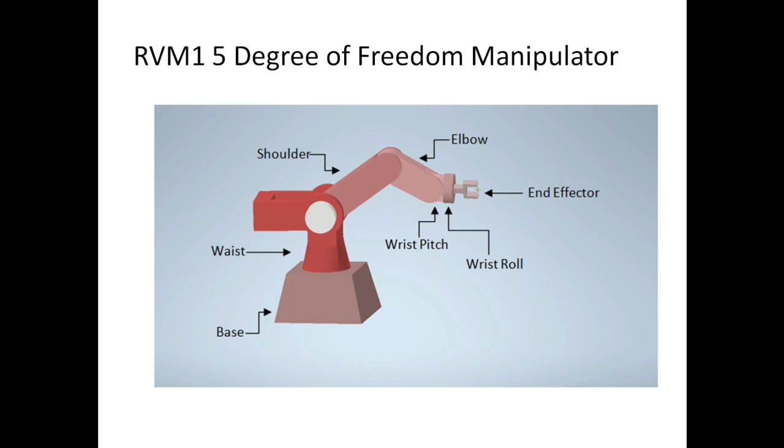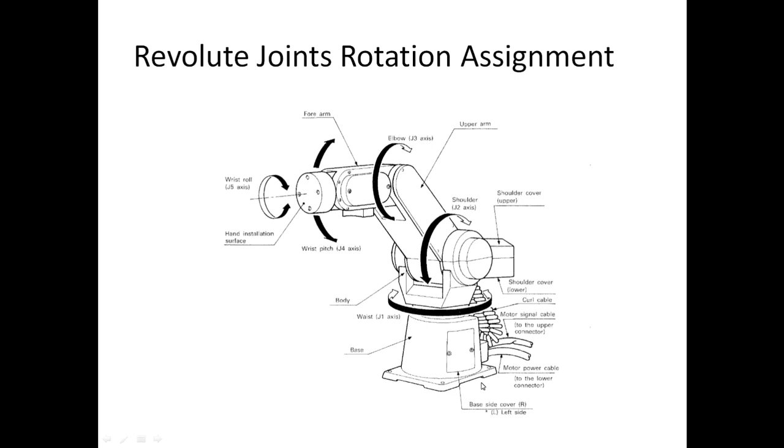So you can see here, this is a 3D model that I created using Autodesk Inventor. The joints are actually all different revolute joints. These are the different rotation assignments. Let me show you the 3D model that I have created.

Okay, so let's open Inventor. So this is now the 3D model that I have created. All right, so let's just adjust the view.

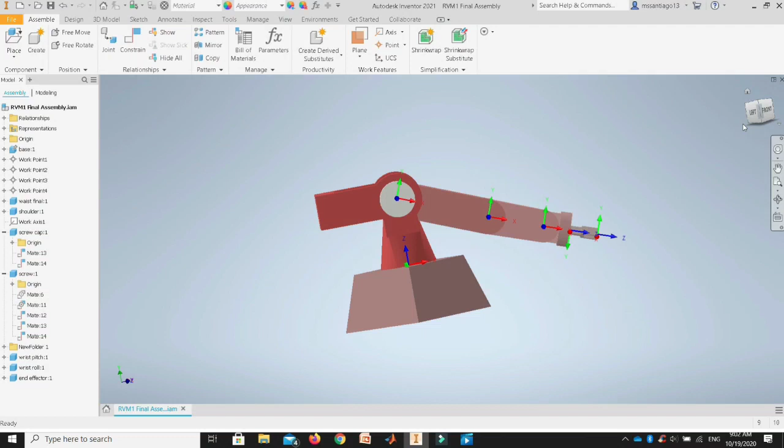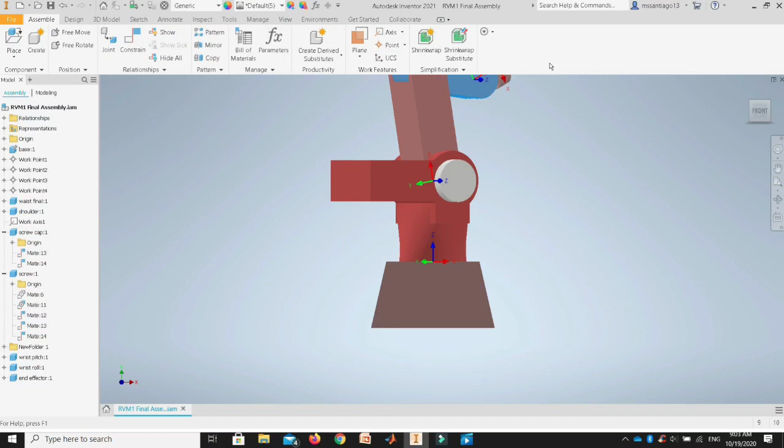Alright, so this is the base, then you have the waist here. The way the waist moves is that it is actually just doing this rotation. Now for the upper arm, that's the shoulder. For the elbow, and then your wrist pitch,

and then your wrist roll. So the end effector will be moving together with the wrist roll.

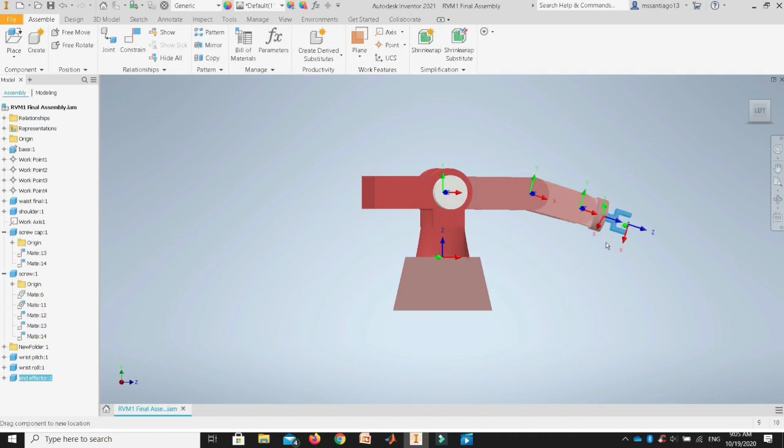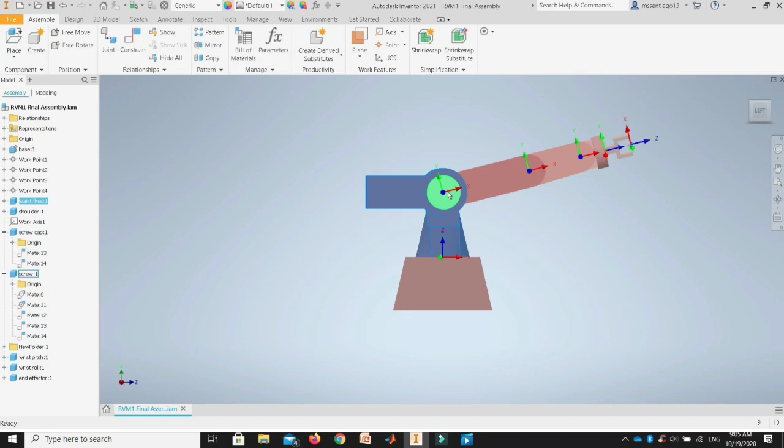Assuming that this is the view of my end effector, if you noticed, you will be only able to see two axes. The third axis, which is represented here as a dot, means that axis is going out of the page, either going out of the page or going into the page. So let's assume that this is the position, or the view, of my manipulator.

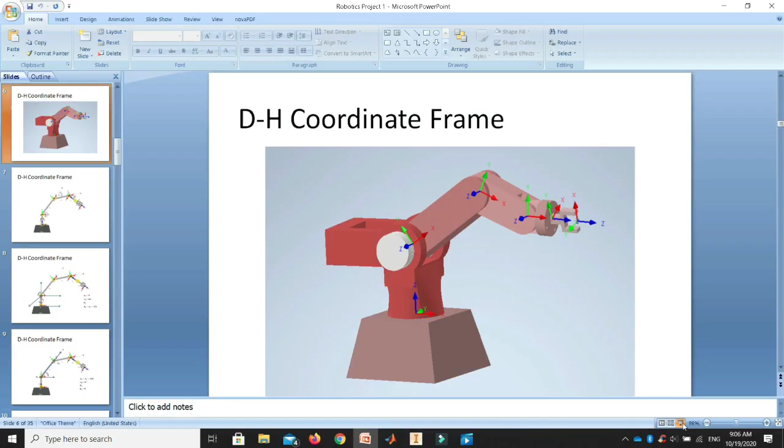Alright, so with that view, I'll be able to create now my coordinate frame. We will be following the DH coordinate frame guideline. First, the Z0 axis. For the coordinate frame guideline, it says that the Z-axis, or the Zi axis, is assigned along the axis of motion.

So we saw earlier that the axis of motion is actually going this way for the waist, which means that the Z-axis, or the Z0 axis, will be going on that motion. So that is why we have the Z0 axis going up here.

Since this is the first coordinate frame that I'm going to create, the zero coordinate frame, there is no Z-1 or i-1 direction or coordinate frame. So I'll just assume my X sub 0 to be going here, and then following the right hand rule, that means my Y sub 0 is actually going out of the page or into the page.

So with that, I also assigned my origin 0 here. So this is now my zero coordinate frame. Now moving forward to the next joint.

So again, the Zi axis, this time the Z1 axis, is assigned along the axis of motion of joint i+1. So this is the link. This is now my joint.

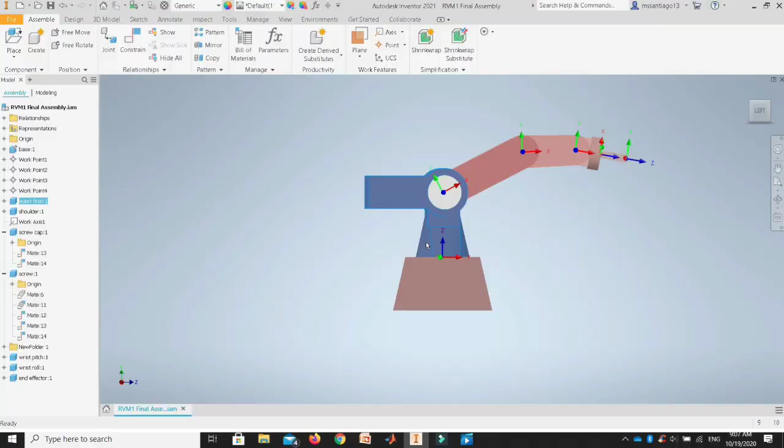So which means if we look at the 3D model, if this is now the movement of my waist, that means Z is going up. My shoulder here, this is the movement, so this means this is the movement, then the Z will be going out of the page. So that is the direction of my Z.

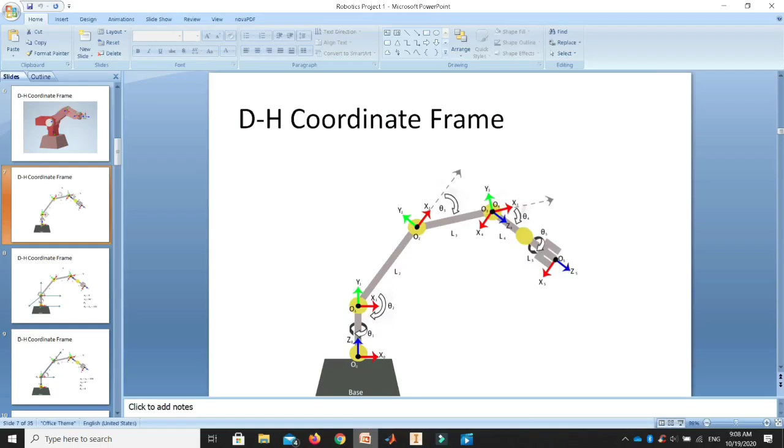So that is why Z sub 1, you won't be able to see it here. Z sub 1 is actually going out of the page. And then for the x-axis, if the Z sub 1 and the Z sub 0 axis intersect, so Z sub 1 again goes out of the page, then your Z sub 0, if you extend it here, they are actually intersecting. So the X sub 1 axis will be determined by the common perpendicular.

So this means that if Z sub 0 and Z sub 1 is going out, then X sub 1 will be at this location. And then following now the right hand rule, I have set that Y sub 1 is going up.

Now for the origin of your X sub 1, Y sub 1, Z sub 1 coordinate, it is at a place where the Z sub 0 and Z sub 1 intersect. So Z sub 0 is going up, Z sub 1 is going out of the page. They are intersecting here. Thus, we set the origin 1 at this point.

Next, we go to the second joint. For the second joint, again, we look at the direction of motion. It's actually the same as your joint 1, so the direction of motion is also going this way. So that means that Z sub 2 is all again going out of the page.

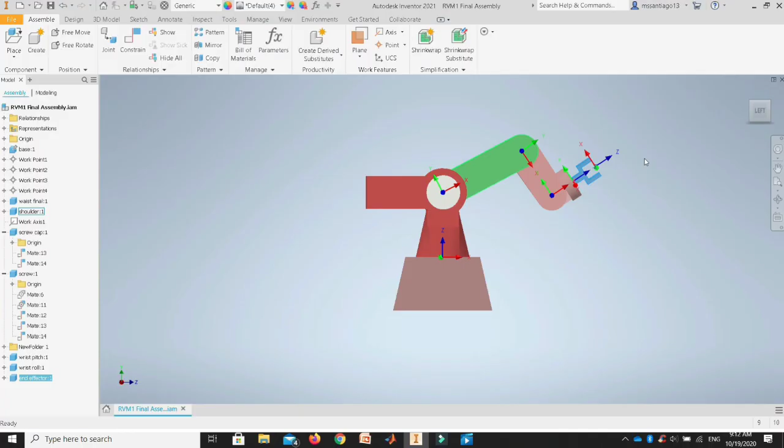So this is actually my fourth joint. The axis assigned for this one, since the fourth joint is the wrist roll, the movement is different from that of the previous joints. If you look at the 3D model, the previous ones are actually moving that way. But for the wrist joint...

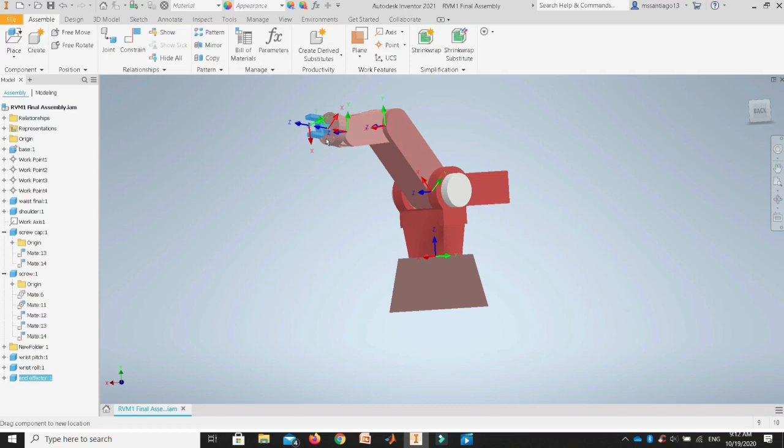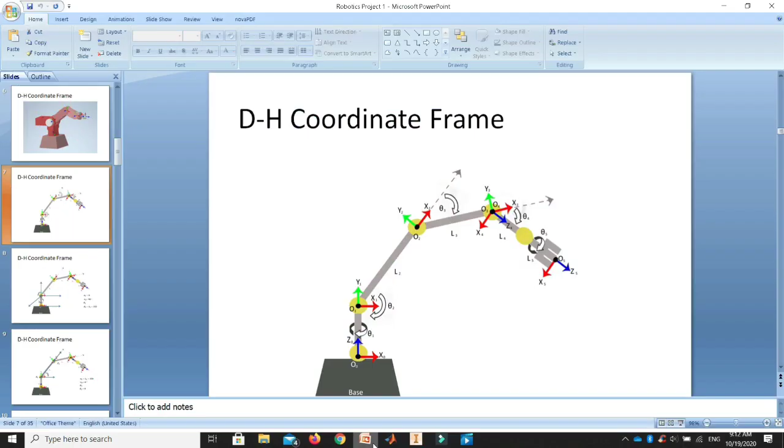Let's have a better view. So if you try to move it, this is actually the movement of your wrist joint. With this movement, we are able to assign that the z axis is actually going in the direction of motion. So this means that for z sub 4, the direction of your axis is here. So that is the direction of your axis, z sub 4.

Now for x sub 4, we look at z sub 3. z sub 3 is going out of the page here, and then we have z sub 4. They are intersecting, so what is the common perpendicular of these two? This is now my x sub 4. Then following the right hand rule, y sub 4 is going out of the page, that's why we don't see y sub 4 here.

Now, why is it that my z sub 4 and x sub 4 coordinate is placed here at the same origin as origin 3? That is because of the fourth rule, wherein the origin of the x sub 4, y sub 4, z sub 4 coordinate for this link is placed at the intersection of z sub 3 and z sub 4.

This is z sub 4, z sub 3 is going out, so this means the origin is here. So I'm going to transpose or transfer the coordinate axis to this point. That is why origin 3 is also origin 4, and then you have the coordinate system here.

For the end effector, I actually just followed the coordinate of z sub 4. Based on here, I'm going to place z sub 5 in this direction, so it's actually the same as my z sub 4.

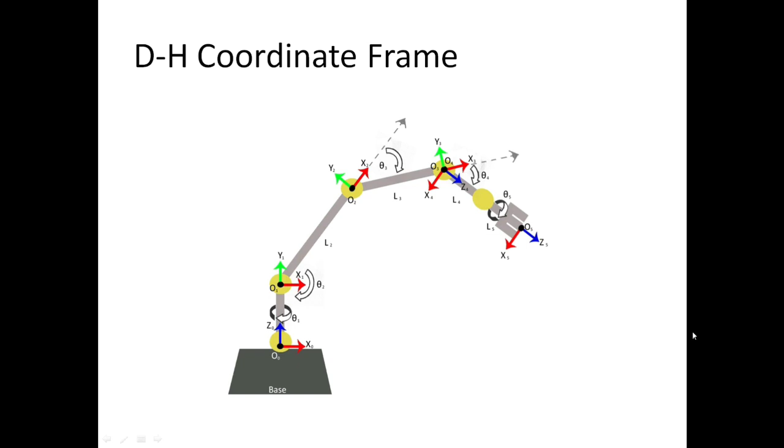Now for the structural kinematic parameters, first let us look at A sub 1. It says it is the distance from the origin, so that is now the origin of the first coordinate frame, to the intersection of z sub 0. Let me extend the z sub 0 and x sub 1 axis. This means that A sub 1 is actually 0, so there is no displacement.

Now for the twist angle alpha 1, that is the angle of rotation about the positive x1 axis, measured from z sub 0 to z sub 1.

So z sub 1 is going out of the plane. Assuming that this is now my z sub 1, so we'll be able to visualize it properly. This means that that is the distance measured along x sub 1 from z sub 0 to z sub 1.

So this is now alpha 1 is 90 degrees. For the joint angle, that is the angle of rotation about the positive z0 axis measured from x sub 0 going to the positive of x sub 1. So there is no displacement for this, or this might be variable. So that is now your theta 1.

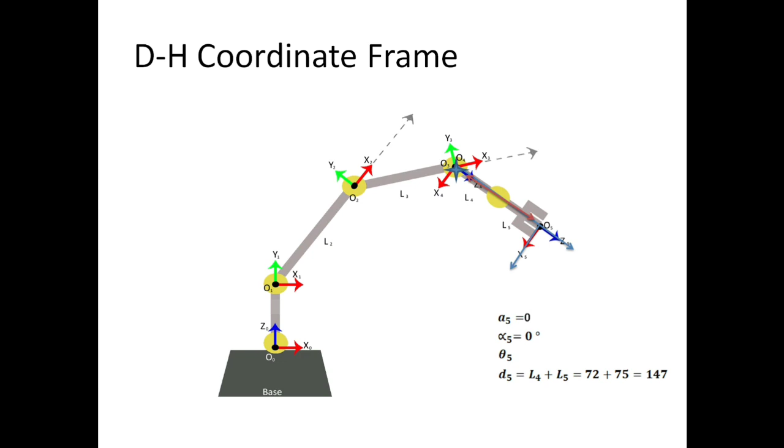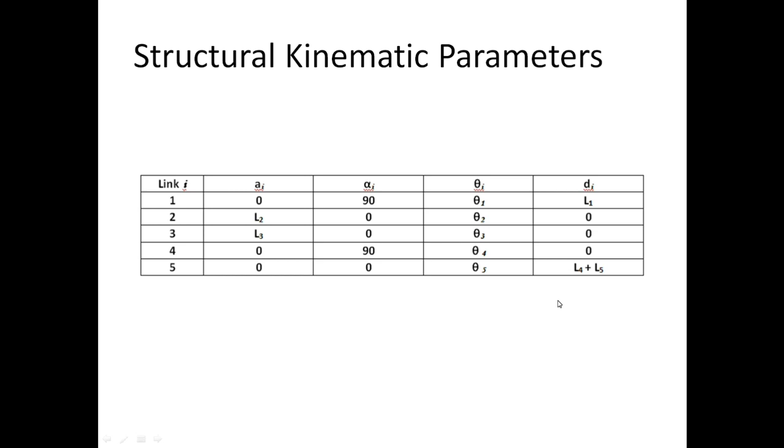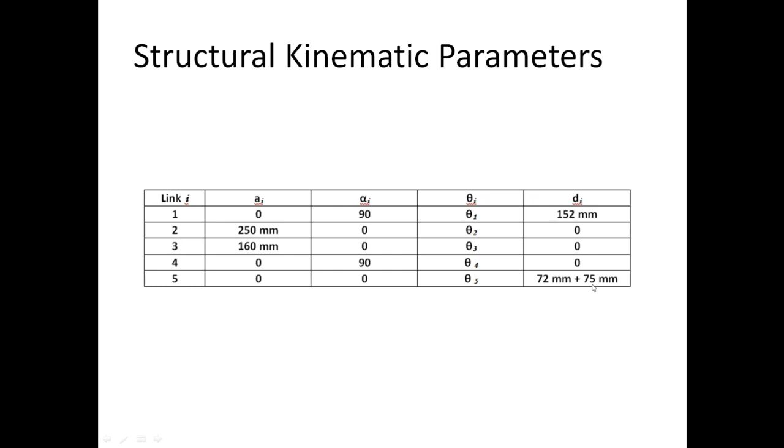Using these parameters, I substituted the values of my link lengths, and using them I'm able to create my transformation matrix. So the transformation matrix from 0 to 1 is this value. Using this transformation matrix, I can now find the position of my point in my end effector, using this formula.

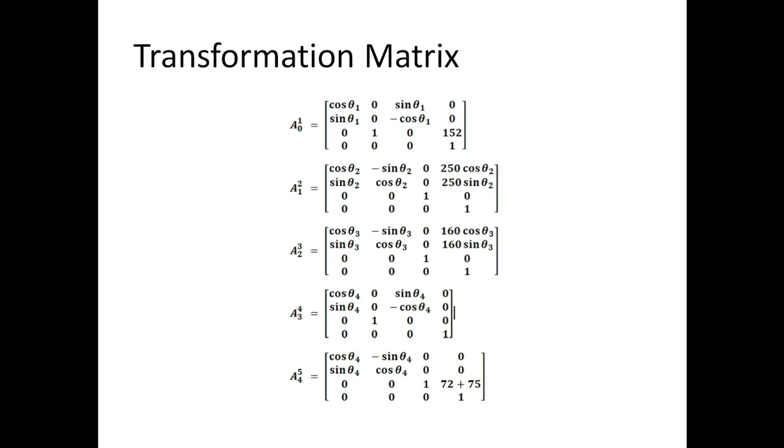Now I'll be able to verify the coordinate frame and the structural kinematic parameters, as well as the transformation matrix, in the following section.

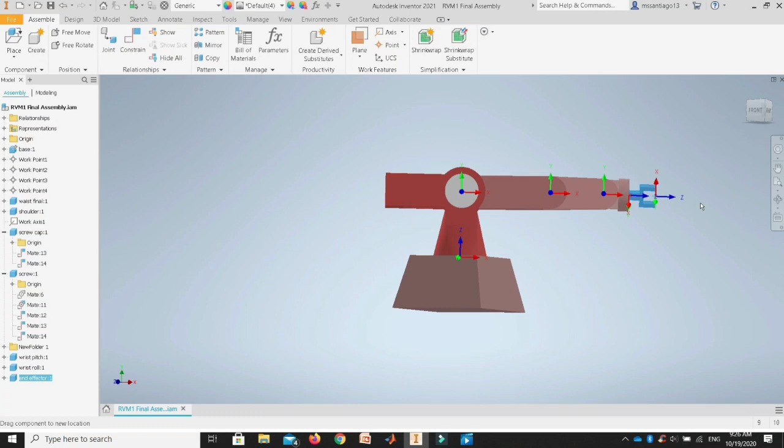Let's assume the following joint angles. This is how the connection should look like, with the angles configured as shown.

Going back to the code, I used MATLAB, and using MATLAB I created a function that is going to get my structural kinematic parameters for the transformation matrix.

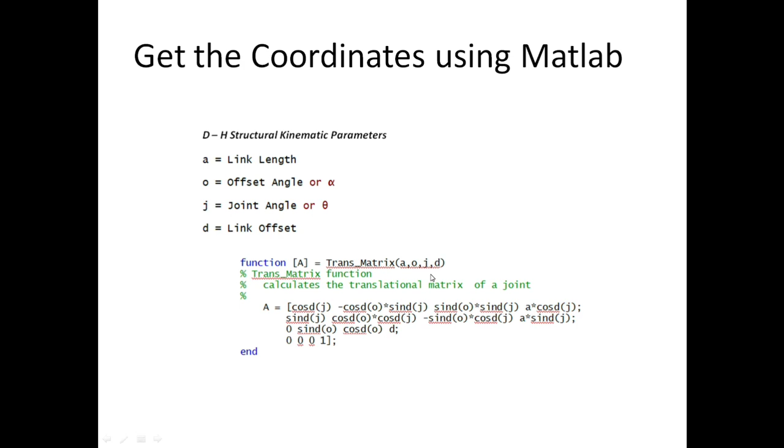Let's go to MATLAB to show this. This is the function that I created, basically using the revolute joint transformation matrix. MATLAB will input the different variables here. So I created a program now.

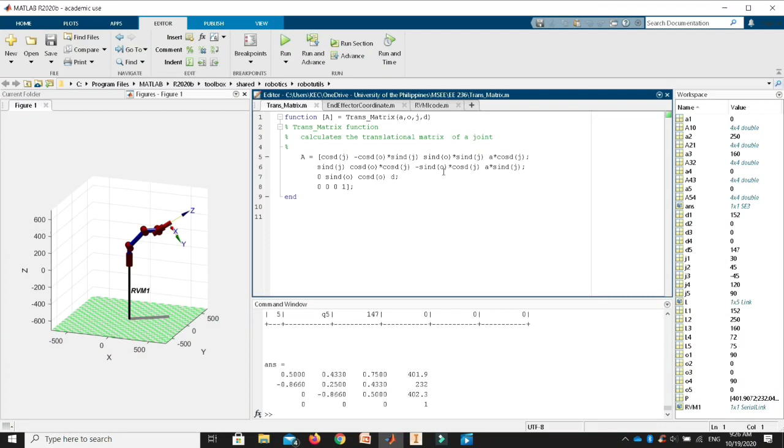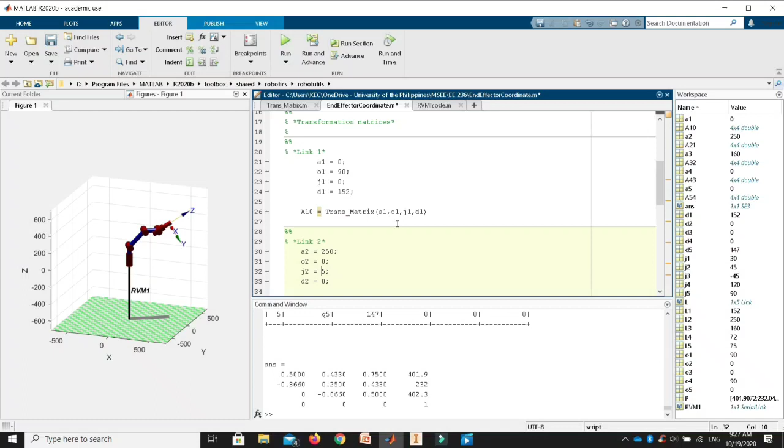From this program, I will simply input the values using the structural kinematics. Assuming theta 1 is 0, theta 2 is 0, theta 3 is also 0, theta 4 is 90 degrees, and theta 5 is at 0.

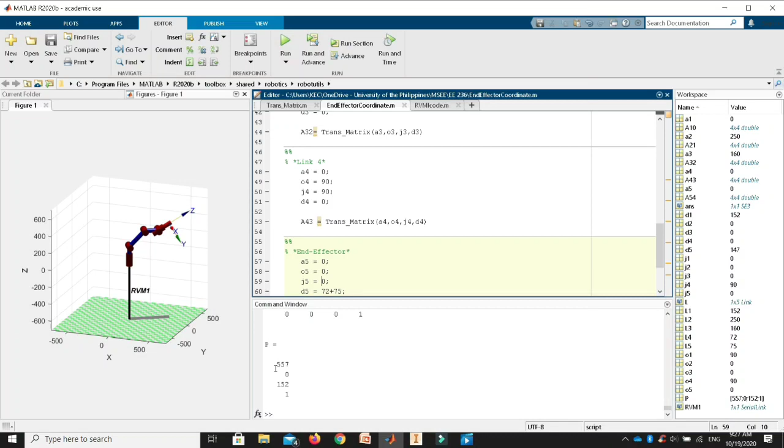Let me run this program. From running, I got the point at location 557 and 152. My end effector position is at x is 557, y is 0, and z is 152. I will try to verify this now using geometry.

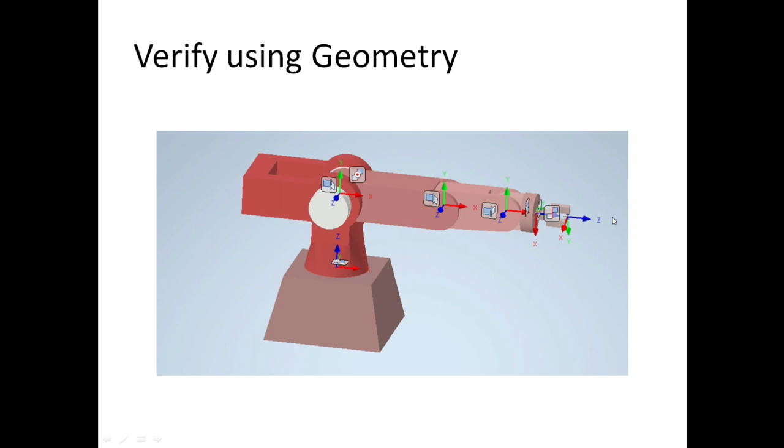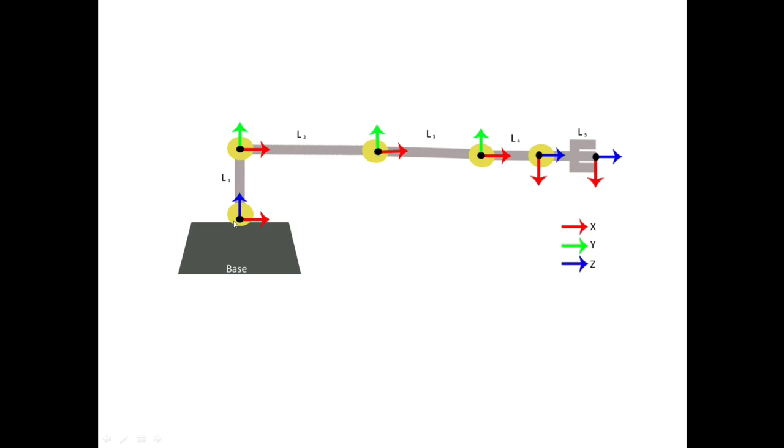Using geometry, this is how the robot should look like. I have L sub 1, and these are just aligned together. This means for me to get x, it is actually L2 plus L3 plus L4 plus L5. For y, since there is no displacement, y equals 0. And for z, it is just this length, L1. So using geometry, we got x equals 557, y equals 0, and z equals 152.

Now I want to verify this further. I installed the Robotics Toolbox for MATLAB by Peter Corke, so we can verify the structural kinematics also based on this code or toolbox. The output of the manipulator should look like this based on the input variables. Let's go to MATLAB.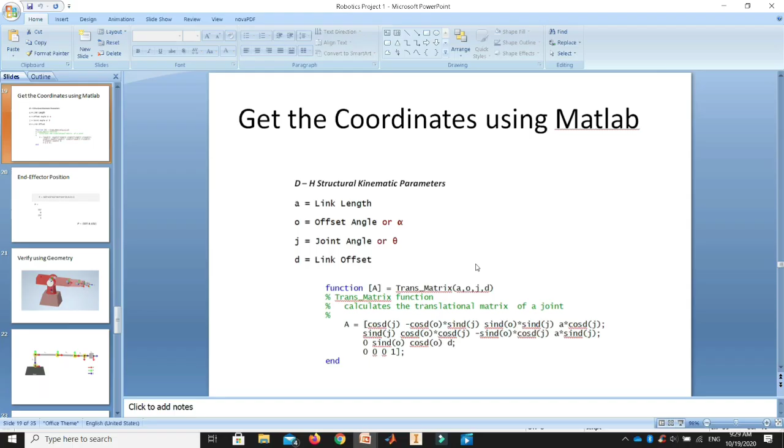This is now my code, so just follow along. We have here the different link lengths: L1, L2, L3, L4, L5. With this link, we are going to create the formula, following this format where Li equals link of theta, D, A, and alpha.

Remember that they are also in radians. So L1 equals these kinematic parameters. For the theta, you place 0 here so the code will generate a variable for that: L1 0 pi over 2, then 0 0 L2 0, 0 0 L3 0, 0 0 0 pi over 2, then 0 L4 plus L5 0 0.

Then we're going to create a serial link and plot the value. This time I will change the angles: theta 1 is 0, theta 2 is 0, theta 3 is 0, theta 4 is pi divided by 2, which is 90, and theta 5 is 0. I will copy this and place it here.

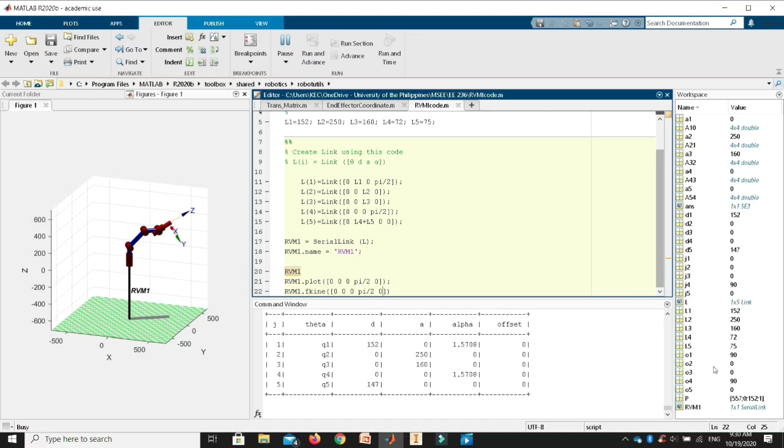Okay, so I run my program. Now notice the angle is here, is that one? So with that, we got the answer. This forward kinematics will give me now the value: 557, 0, 152. So that is the point. So if we look at the summary of the results using the three different processes - transformation matrix versus geometry versus the Peter Corke MATLAB robotic toolbox - they actually generated the same values.

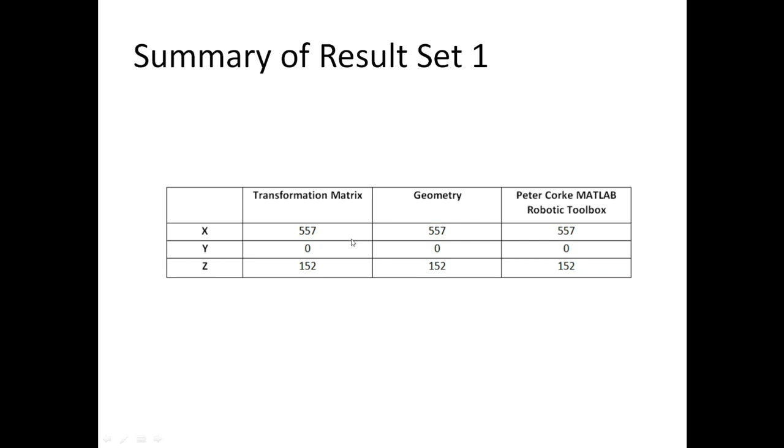Let's try another verification. So using the following joint angles, we have 30 degrees, 45 degrees, negative 45, 120, and 90. So using these joint angles, what will be the point at the end effector? Let's input these values.

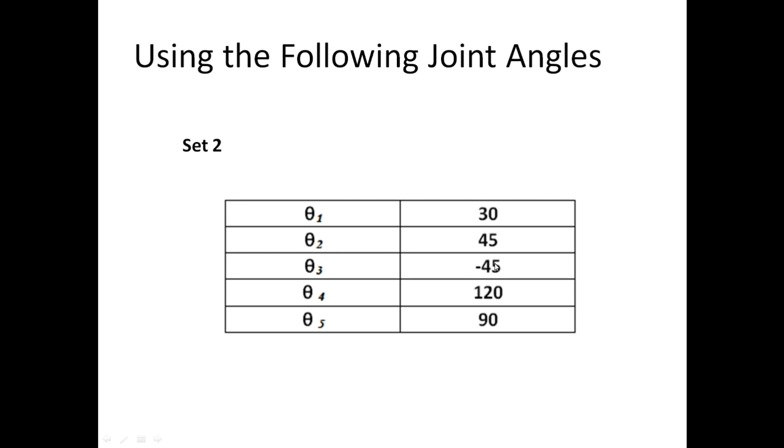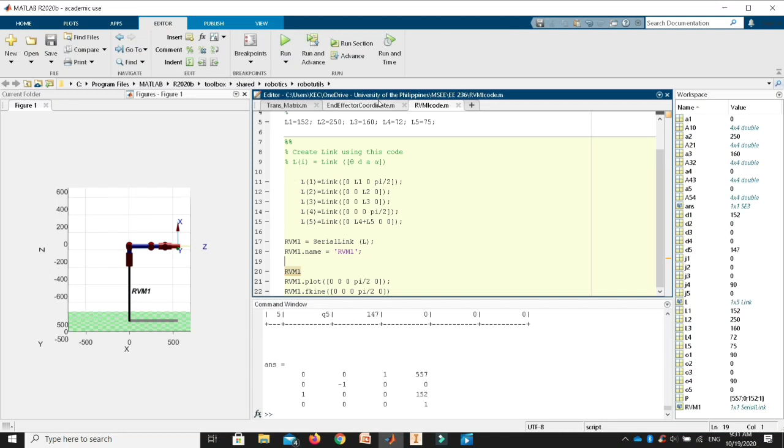If you go back to my transformation matrix, with this code I simply have to set the theta. So I'm calling now my transformation matrix here. First is 30 degrees, next theta 2 is at 45 degrees, theta 3 is at negative 45, theta 4 is at 120 degrees, and theta 5 is at 90 degrees.

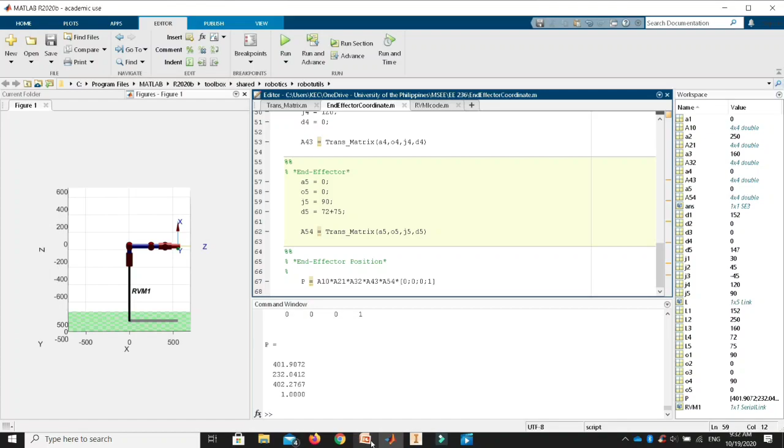Okay, so I run my program. So I got now the value 401, 232, 402. So that is now the end effector position using my transformation matrix and the structural kinematics values.

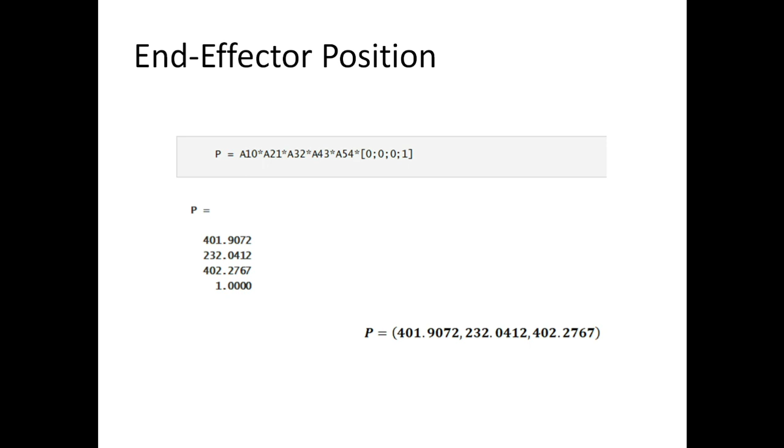Alright, so let us verify this using geometry. So this is how the manipulator will actually look like. So the waist moved 30 degrees, then the shoulder moved 45 degrees, then from 45 degrees it went down again to negative 45, and then you have 30 degrees here, and 90 degrees for your rotation.

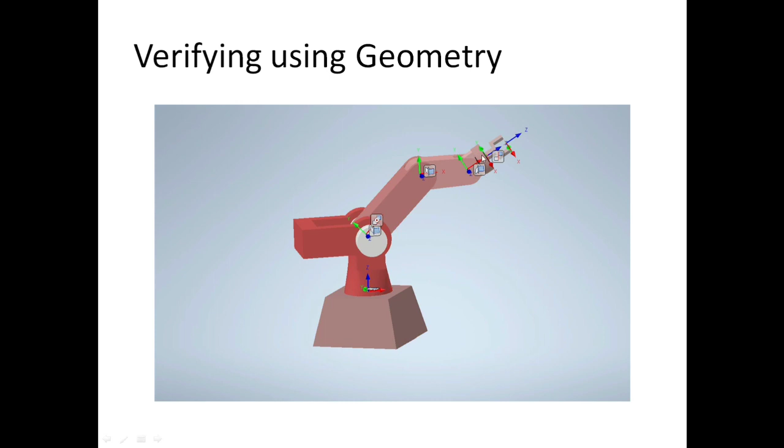So drawing it, we have the following diagram. So your revolute joint here, the waist moved 30 degrees, that is why we have here, and then the shoulder moved 45 degrees. Now to get the x coordinate, what I need to do is get this value: that is L2 cosine 45, which is this line, multiplied with cosine 30 to get the value of x.

X here is L3 cosine of 30. Then for the x value, we have L4 plus L5 cosine 30, multiplied again by cosine 30. That is the value. For your y, that is the L2 cosine 45 to get this value here, then multiplied again with sine 30. The y value for this one is L3 sine 30, and the y value of this one is L4 plus L5 cosine 30 multiplied by sine 30. So that is the y values.

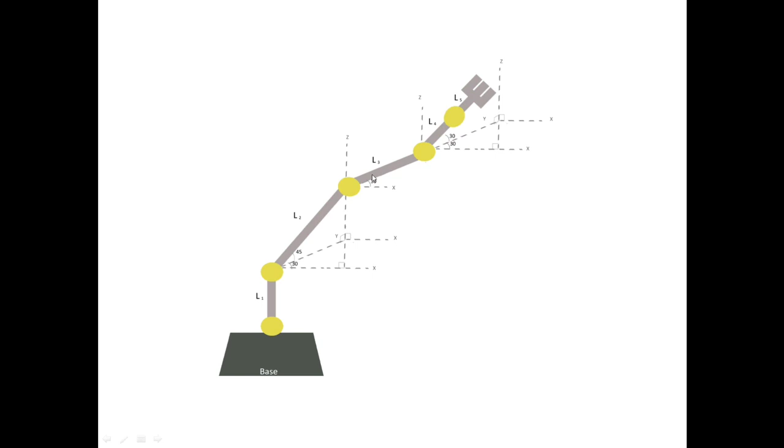For the z value, that is L1 plus L2 sine 45. For this link, there is actually no z displacement - it is horizontal, so it is parallel with your y axis, so there is no z displacement. And then L4 plus L5 sine of 30. So this is now my end effector position using geometry. Using the formula, I got x equals 401, y equals 232, z equals 402. So this is my point.

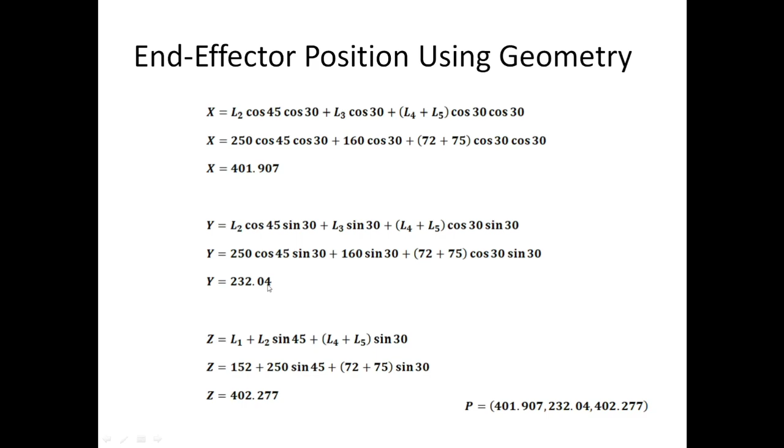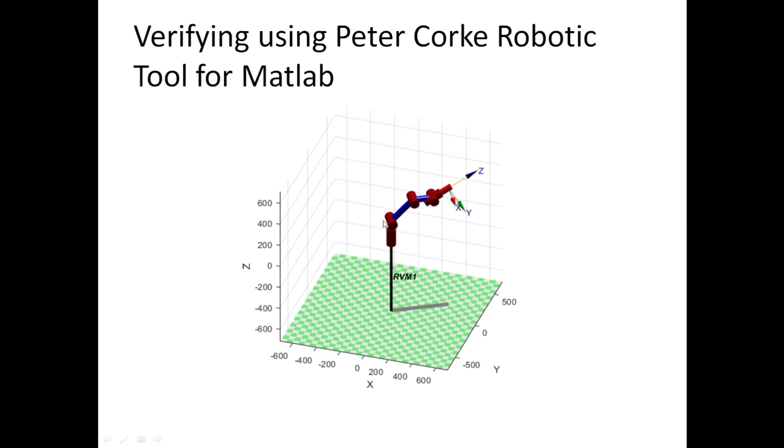So this time I want to further verify it using Peter Corke's robotic toolbox for MATLAB. So this is how the manipulator should look like based on the angles that we gave. Let's open MATLAB - this is my RVM code. So I have here now the theta angles.

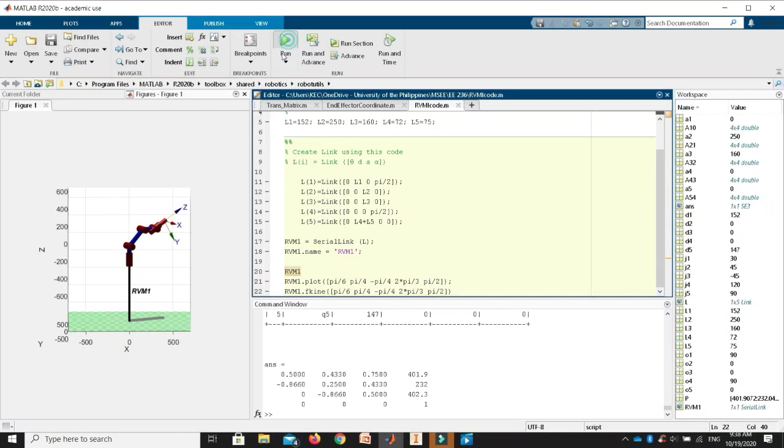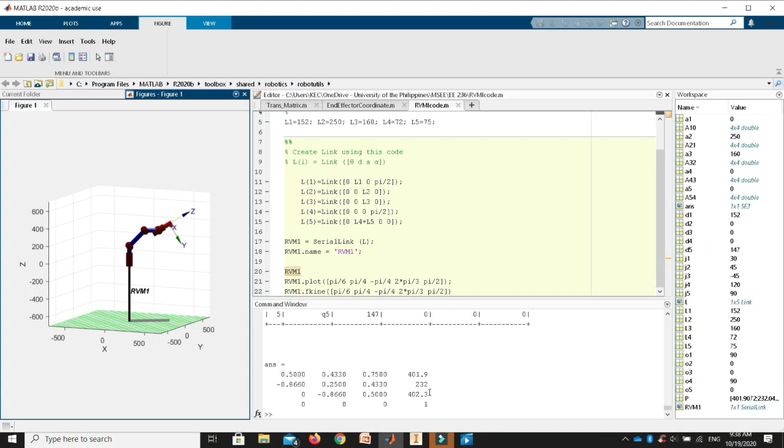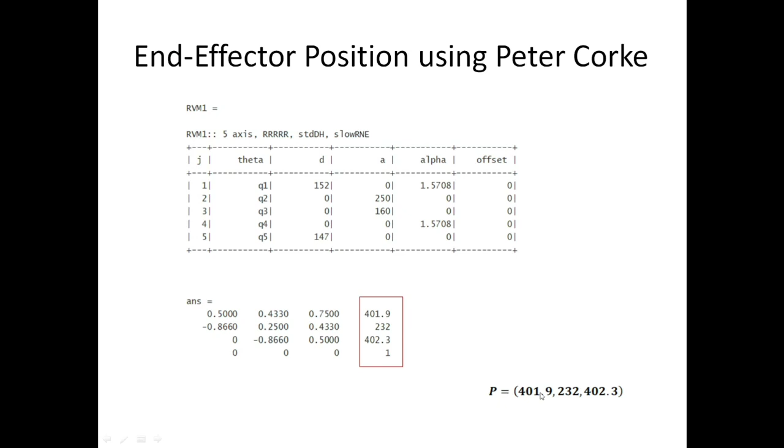So 30 degrees in terms of radians is pi over 6, then 45 is pi over 4, negative pi over 4, 120 is 2 pi over 3, and 90 degrees is pi over 2. Let's run this. Running it gives me now this manipulator here, and then I have here now the XYZ values: 401.9, 232, 402.3. So using Peter Corke, it gave me this point, 401.9, 232, and 402.3.